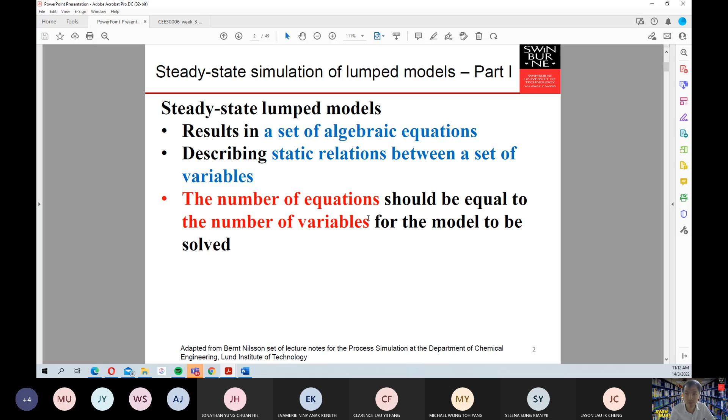So these are the two types of the lumped model that we have: the linear equation systems and the nonlinear equation systems. If you have linear equation systems like this, this can be represented in terms of a matrix, so that will be Ax equal to U, where A is a matrix, X is the matrix of X, normally a column vector, and U is also a column vector.

Okay, in some cases you may also have nonlinear equation systems, meaning it's not linear like this, so it cannot easily be described in terms of a matrix. Instead you have to maintain this form, where f(x) is equal to 0. We will start with the first type, the linear equation system, to solve.

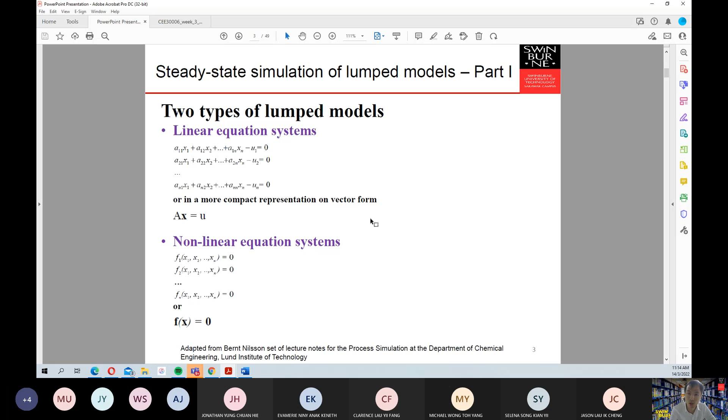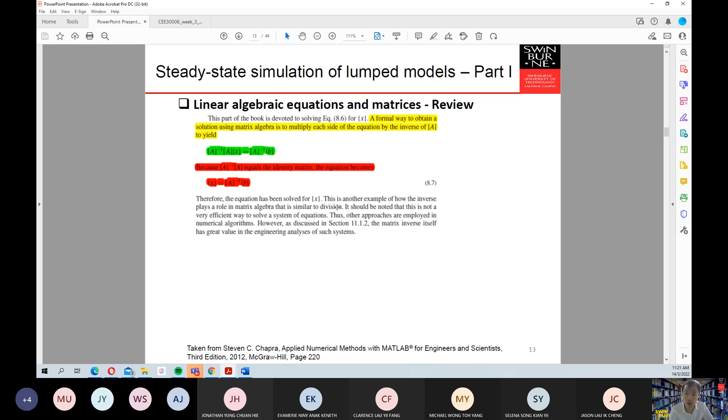Everybody knows this very well, and this is supposed to be easy in MATLAB. Now, we go a little bit into MATLAB. MATLAB is actually an abbreviation of matrix laboratory, because the way MATLAB works is it uses a lot of matrices, and if you can put your logic or computation operations in terms of matrices, that is what MATLAB is for. It's best if you use matrix operations, but it's not limited to matrices. It can also go beyond matrices.

The strength of MATLAB comes from its capability to do numeric computation, advanced graphics and visualization, and also a high-level programming language. MATLAB also has many integrated toolboxes that cover specific areas of engineering applications, such as process control, neural networks, optimization, signal processing, and symbolic mathematics.

Like I showed you in process control, your project one is based on MATLAB coding. That MATLAB code is used to simulate how a proportional integral controller is embedded into the temperature control of a continuous stirred tank reactor, where you have a mass balance, a component mass balance, an energy balance for your reactor, and also an energy balance for your jacket.

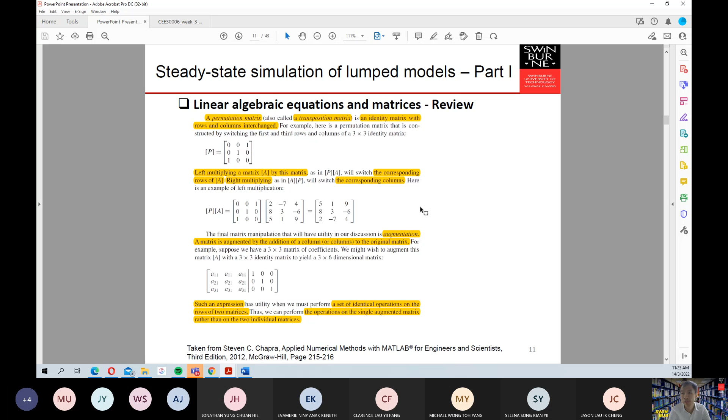You can also set up another 2 times 3 matrix. A 3 times 3 matrix cannot be multiplied by a 2 times 3 because the inner dimension does not match. 3 is not equal to 2. Then MATLAB will return error information in your command window. But if you multiply 2 times 3 by 3 times 3, then it will be possible, and you will have a 2 times 3 matrix.

You can also easily find in MATLAB the inverse of a particular matrix. If you multiply A with its inverse, then you will have an identity matrix. You can also make an identity matrix I equal eye(3), and you can make a permutation matrix and check. If you want to switch the rows, then you multiply P before A. Likewise, if you want to move the columns, you multiply A with P. This is how you make an augmented matrix.

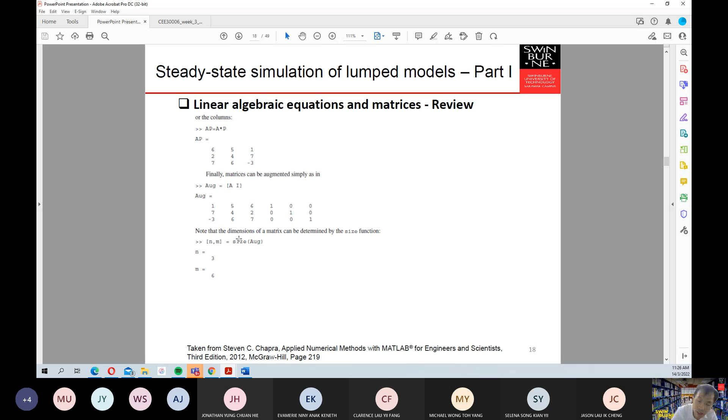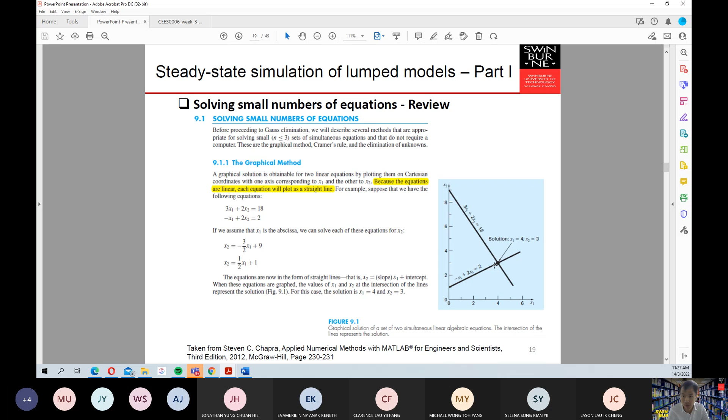In MATLAB, the command size gives you the number of rows and the number of columns. So if you have two equations, the easiest way to solve them is to plot these equations in the Cartesian coordinate, and plot the other equation as well. The point where the two lines intersect each other is where the solution is. So that's how it is.

And then this shows different cases where it's difficult to find a unique solution. For example, in A, because the lines are located at different locations, they don't touch each other, so you will have no solutions. In the second one you have infinite solutions because these two lines are basically the same. And in the other one the lines are almost intersecting at more than one point, so it's very difficult to detect visually.

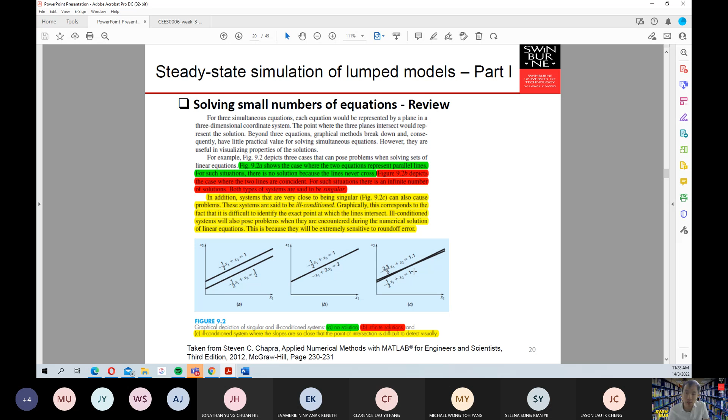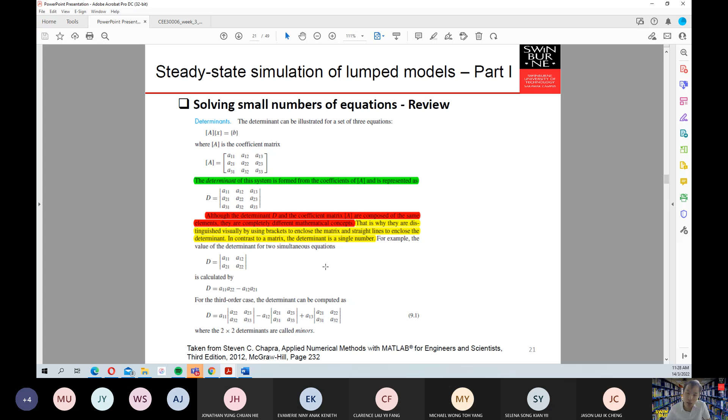So this one will give you a large error. This kind of system where you don't have a really specific solution is called an ill-conditioned system. So we can solve this set of three equations using something called determinants. The determinants show you how they are being solved.

However, the best way to solve a matrix is through Gauss elimination. In Gauss elimination we use forward elimination followed by back substitution. So this is how it works. Imagine you have n equations. What we're going to do is try to make all these equations into this kind of matrix, where all the components below the diagonal elements become 0, so that we know the value of the last x.

Once the last x is known, we can back substitute into these equations to get the next component, x2. Once we know x3 and x2, we can back substitute into the first equation to find the value of x1. So everything will be working like this.

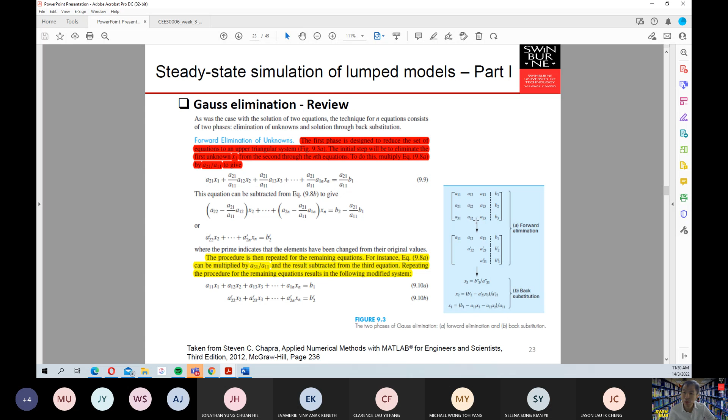What you need to do is multiply by a21 divided by a11 in order to get the same value as a21 here. Then you subtract these equations from this one. Once you do that, you will get this. Then you do the same thing with the third one, until you get this.

I will not go into the details here, but I think you will be able to understand the logic easily if you read it in detail. So we have two main steps: the first one is the forward elimination of unknowns, and the next one is the back substitution.

So these are the examples. Okay, I think you can go and check my recorded video to see how I do that. I recorded it in previous years, and I think I have uploaded it into Canvas, so you can replay it to see how the Gauss elimination is done.

So you have these three equations here. The first thing you need to do is eliminate this component here and this component here, so you will get this. Then afterward, using this one, you eliminate these terms here, so you have the matrix where the components lower than the diagonal are 0. Then you will be able to find your x3. Your x3 will be equal to a certain value. You back substitute here and back substitute here to get the x1.

The thing that is very important here is to resubstitute your x1, x2, and x3 as a check to make sure that you recover these equations from the beginning. It's always very important for an engineer to cross-check to make sure they get the same values that are defined in the beginning.

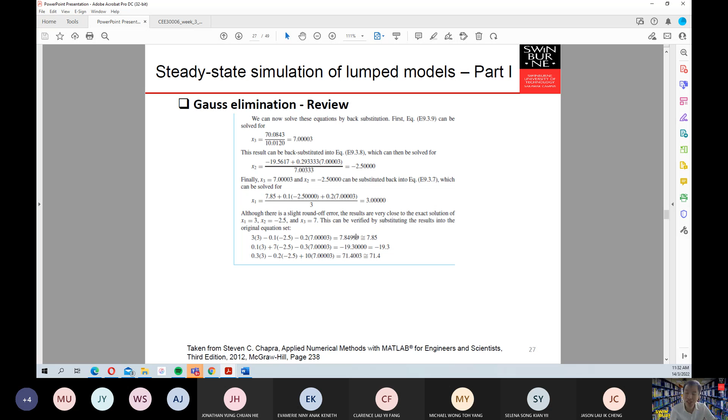Everybody is still with me? Or because it's almost lunchtime, you feel a bit sleepy like me, ready? So now we have... okay, yeah, good. You can go a little bit away from your table, Jason. It's okay. I just get my tea a little bit here, and that's allowable.

So we have gone through the discussion in lecture 2 of the 6-plate absorption column, right? We developed that in the previous lecture notes. So now here we would like to solve the model. Remember, the first one comes from the component mole balance. The second one here comes from your thermodynamics, and then we take the simplest assumptions.

If I were there, I would be happy to share my tea bag with you, Clarence, but unfortunately I'm not a fan of coffee, so I don't have a coffee bag.

If we have this thermodynamics here, it is the simplest thing that we can do to picture it.

Well, I don't have Mamak easily outside my house because I don't really go into the office today. Okay.

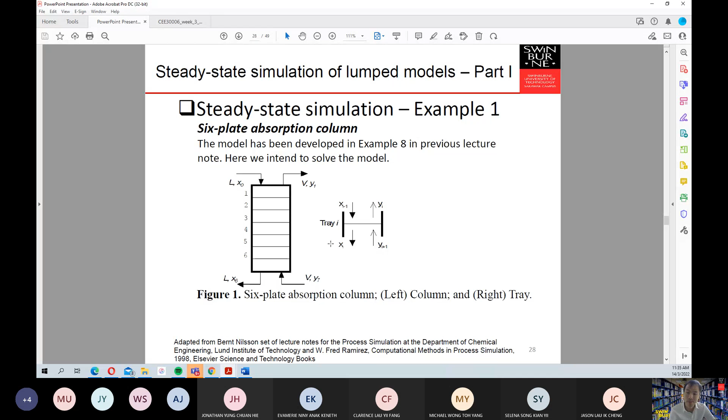Now this has been clearly written here. This is the mole fraction in the starting liquid, and the mole fraction in the starting vapor. We can add another simplifying assumption such that b equals 0. That gives us these things here, which can be written in matrix form like this. So guys, this is very important: you need to visualize that this component here is actually the same as these things here.

Okay, because the way that the matrix is working for the first row in here is that minus (L plus VA) multiplied by x1 plus VA multiplied by x2 is equal to minus L x0, to get this one. On the second row is L multiplied by x1 minus (L plus VA) multiplied by x2 plus VA multiplied by x3 is equal to 0 in here.

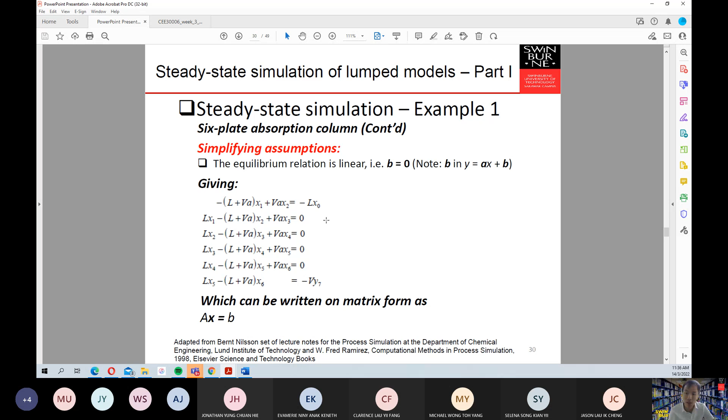Okay, so this has the same form as this form in here, and this is the so-called banded matrix. So this one is similar to your tridiagonal matrix basically. Okay guys, everybody gets it up to this point? Okay. So what you need to do is easy. You can either multiply the inverse of A by B, or you can just use left division operations to get the value of your X.

Okay. So how do we solve these things? So the first example is we need to set up a typical set of parameters. We put in an A value of 0.72. This one is coming from the thermodynamics. It has to be physically relevant. Your V has this value in here, 66.7 kmol per minute. Your L is 40.8 kmol per minute.

We want to solve for the two cases. For x0, imagine that you are putting in pure water, and the mole fraction of the component that you want to scrub is 0.2, the other one is 0.3. So these are the solutions for each. For x1 you will get 0.0614 and this is 0.2547. If you put in 0.3, then obviously your x1 will be larger than the respective one in here.

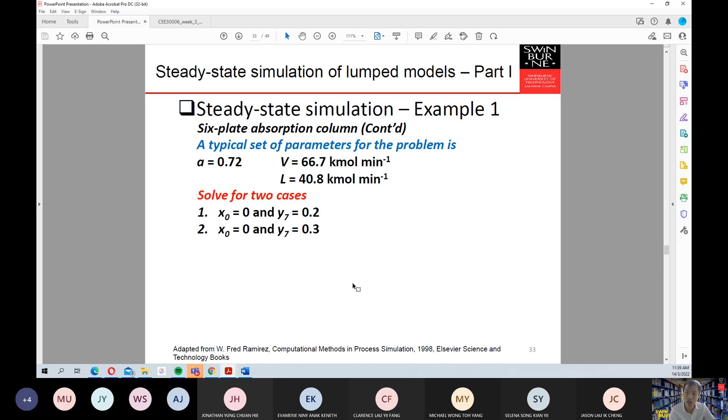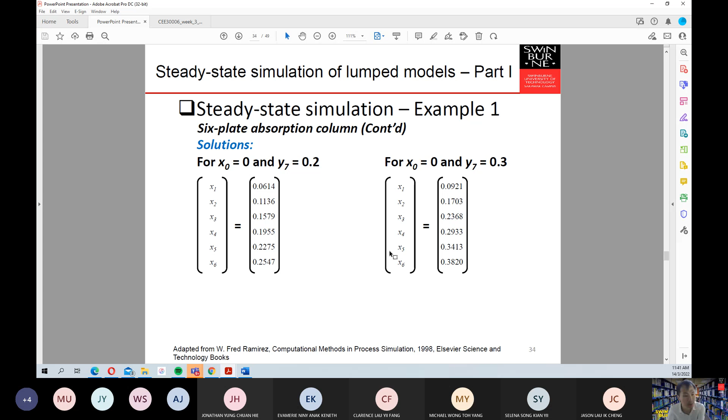Then you can use either matrix inversion, or Gaussian elimination or the left division to solve that thing. Then these will be the solutions that you get, which are supposed to be the same as the solutions in here. Guys, up to this point, I hope you understand. So this is if you just want to use it the easy way.

That's just 10 lines of code. I want to run the MATLAB coding in here, but I'm not too sure whether we already have access to that or not. Probably not. So if you have MATLAB on your computer, then you can try these things and see how to use them.

Okay, start using MATLAB. I'll try to see first whether I can use this or not. If I cannot use it, then I will not be able to demonstrate to you. But I have contacted Usha to check whether we have these things already or not, because I tried to use my Swinburne one, and it was also not working last time. But you can always install the crack version, or you can go into the Open Computer Lab that has MATLAB.

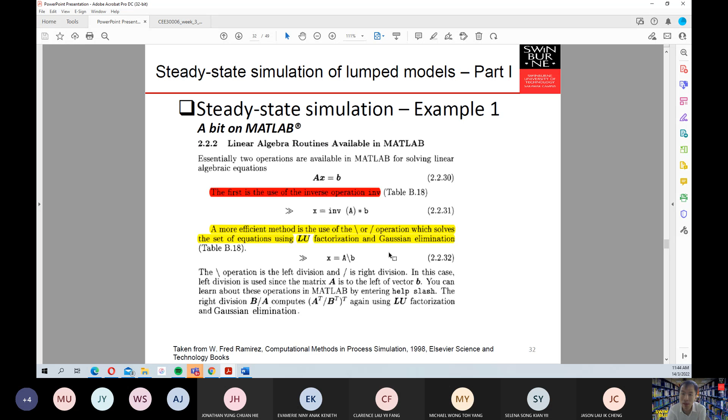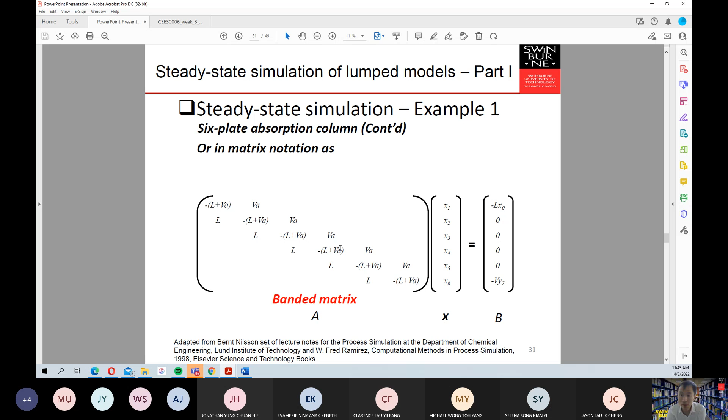So we can simply create this matrix easily using this particular instruction. And then we can easily create this U here. This is your column vector here, right? This column vector is what is being created. Then you do left division.

How do we know that this gives you the same result? Because the result given is the same here. If you compare it with the previous one, the result is the same, except that we are dealing with much shorter coding. So coding is a skill that you can master, not easily, I would say, but you can master it after you keep on trying and exploring and learning.

Okay, the same thing. What you need to do with the 0.3 is just change the value of y7 here, and you should end up with the same solutions as these solutions here that you get from the 0.38 to 0. So far, before I go into the next example, which is a bit more comprehensive, I would say, does anybody have any questions?

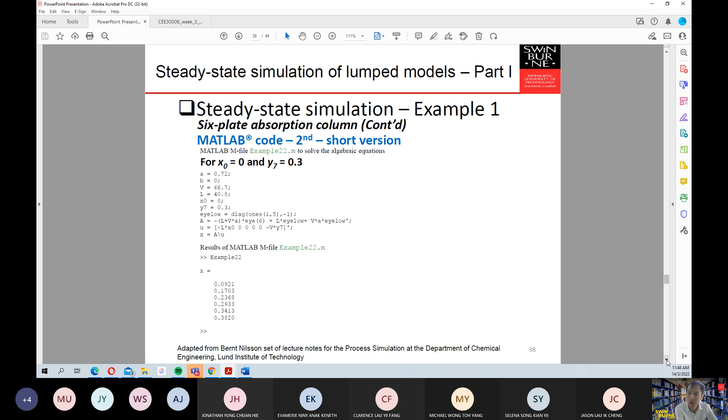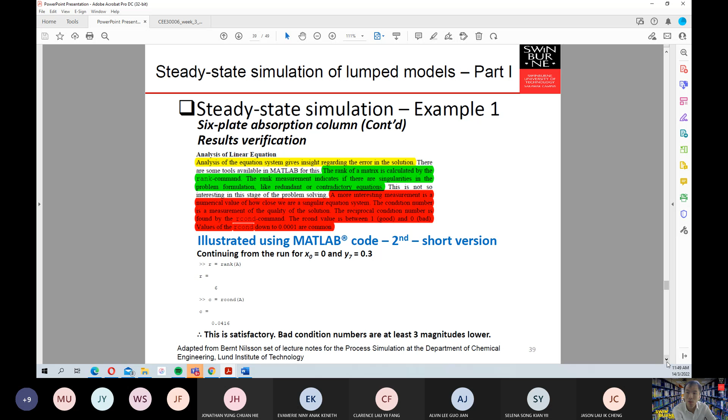Okay, so is everything clear up to this point? Then in particular situations, if you are wondering whether your system may provide singularities, or how good your system solution is, what you can do is check using the rcond command. You can do that using rank and rcond. Generally, the rcond value that is much farther from 0 is better. So if you put in the matrix A here, you will get that the rcond is 0.0416, which is quite good for your problem statement.

Okay, now who is taking process mass transfer already this semester? Anybody take process mass transfer already, or will that be next semester? Has anybody gotten mass transfer a little bit or not? No? Alvin, you did mass transfer already, right? Clarence, not yet. How about Yusi? Yusi, not yet. Jonathan, you did it with me, right? Last semester already, Jonathan with me.

Unfortunately, process modeling and control, process modeling and optimization covers so many models as well, and I cannot just keep my coverage to heat transfer only or momentum transport, because you guys need to know much more than that in order to understand what process modeling is about. So I have to introduce some concepts even before you learn about process mass transfer. Yep, supposed to be Clarence, I think. That sounds about right, I think.

But we will go a little bit into the McCabe-Thiele method here. McCabe-Thiele method basically shows you how to calculate the number of stages needed to achieve a particular separation for a binary distillation column that is ideal. McCabe here comes from the name Warren McCabe, an author of the textbook in unit operations. Thiele also comes from a famous chemical engineer. If you go into mass transfer later on, you will know there is a ratio between reaction and diffusion, and you come up with a dimensionless number called the Thiele modulus. Both of these guys actually got their education in America. I think Thiele is educated in MIT, if I'm not wrong. Both of them are heavily involved with research in chemical engineering, and I think both of them have a PhD in chemical engineering.

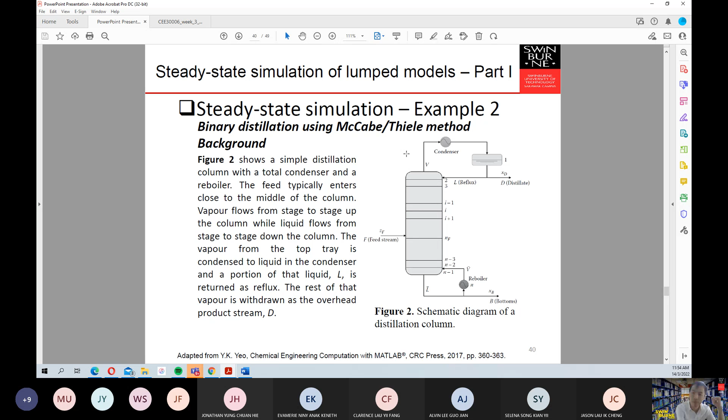So in the end you will have 2 components here, the distillate and the bottom components. A chemical engineer will split this distillation column into 2 different balances, like the same case with the absorption column: one is a mass balance, the other is thermodynamics. That's how a chemical engineer designs this kind of unit operation. In terms of absorption, you have thermodynamics and you couple it with the mass balance. So for this particular problem, we are splitting this distillation column into 2 major portions: the top components here, and the bottom column here.

The section we split at the top here is called the rectifying section of the distillation column. The reflux ratio here is defined as R equals L divided by D, because this represents how much you put back into your column relative to the amount you take out of the column.

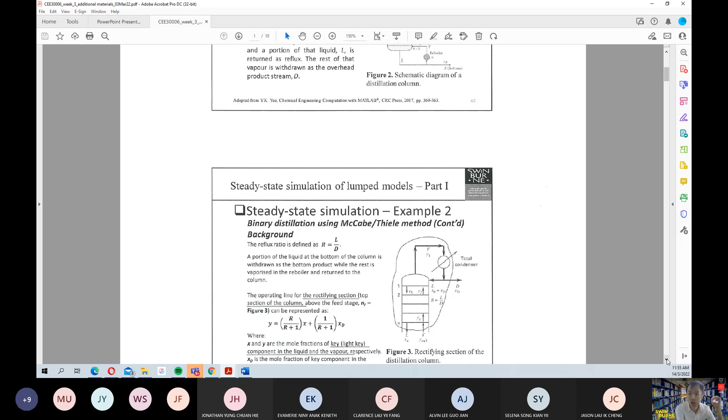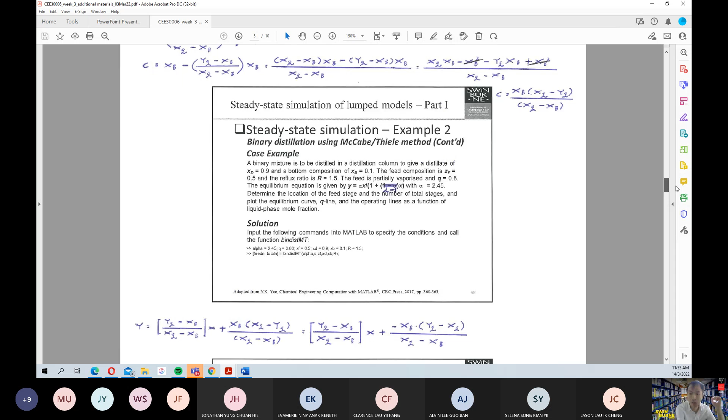The operating line for the rectifying section can be represented by these equations. If you want to express this in terms of the reflux ratio with x and xD, you might ask how I derived these. So you go back into the additional materials. I won't go into the details here, but in one of my recording videos, I showed the details, including all the equations needed to understand how we derive these and how the MATLAB code works.

This goes back into the lecture notes that I took from somebody else. This is the so-called McCabe-Thiele graphical method. You'll get this in more detail in your process mass transfer course, but you already get it in much more detail from now on, because this is part of your process modeling anyway.

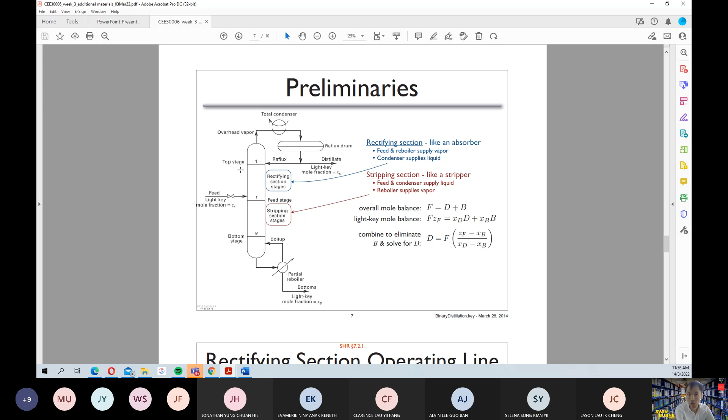So to figure out how you're going to do that, this is the mass balance on the whole column. If you want to make this boundary fit with the distillate and the bottom, this is what you need to do.

If you want to make the balance on the rectifying section, this is the additional material showing how to do it. You make the mass balance over these boundaries, consisting of the overall mass balance and the light key mole balance. Then you use this, do a little mathematical manipulation, and you get these equations here.

Okay everybody, I hope you are clear with me up to this point. Everything has been given to you, but you need to figure out the details by yourself. So these are the rectifying column equations.

Then we can go into the stripping section of the column, where you have the reboiler. If you make the same mass balance as before, what you essentially get is the operating line expressed in terms of the boilup ratio. The boilup ratio is the same concept as the reflux ratio, in that it represents the ratio between what is put back into the column and what is taken out of the column.

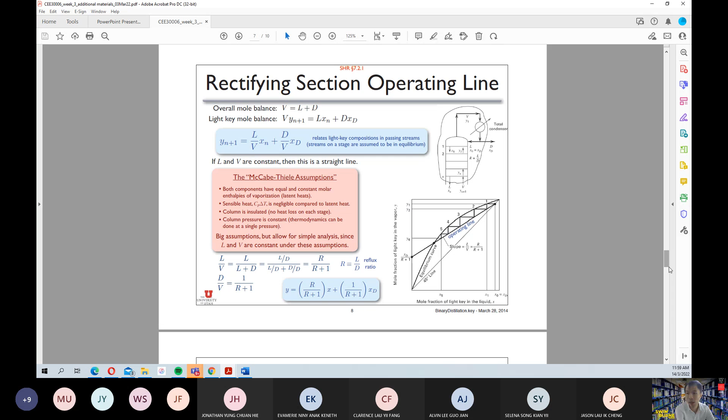So how about the stripping section? It's the same approach. Now, this is a mistake that I found and need to correct, and you guys need to check everything. That's why after the lecture, it's very important to always check everything to make sure it's correct.

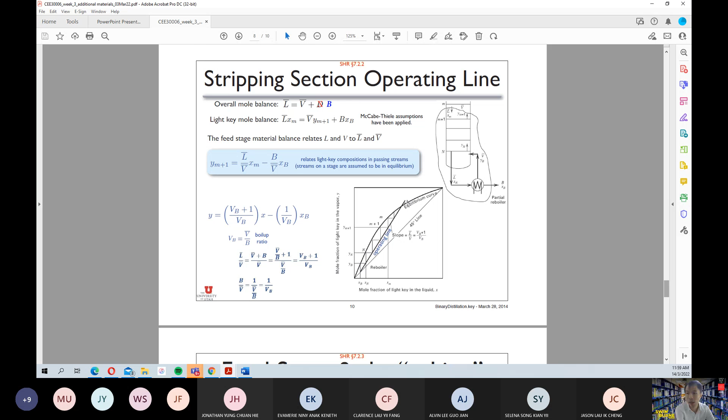If you do these things correctly, you will get this result, and this gives you the operating line here.

So you will have a set of relationships depending on your feed condition. If it is a subcooled liquid, it will go down. If it is a saturated liquid, it will go down as well. If it is partially vaporized, the vapor fraction will go up and the liquid will go down. If it is a saturated vapor, it will go up. If it is a superheated vapor, it will go up. That will affect the slope in here.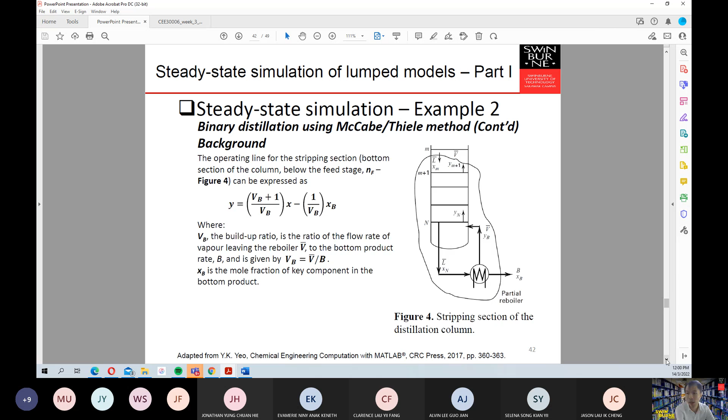So if I go back again to my original slides, after you figure out the stripping section, you will be able to go and basically check these conditions in here.

This is basically characterized by the parameter Q. Q is the ratio of the increase in molar reflux rate across the feed stage to the molar feed rate.

So this is basically expressing what will happen as you go from the bottom to the top, from the stripping section to the rectifying section.

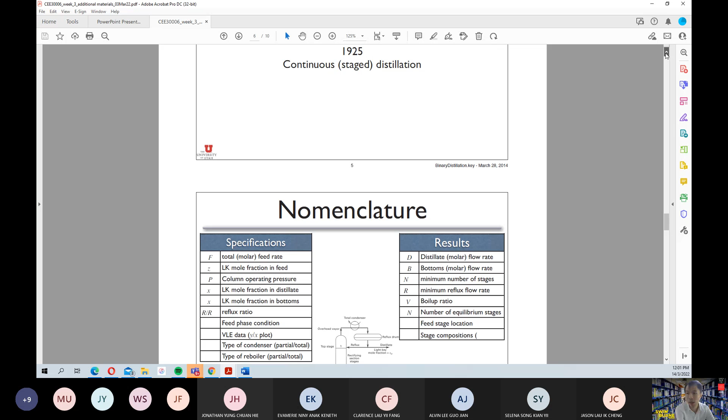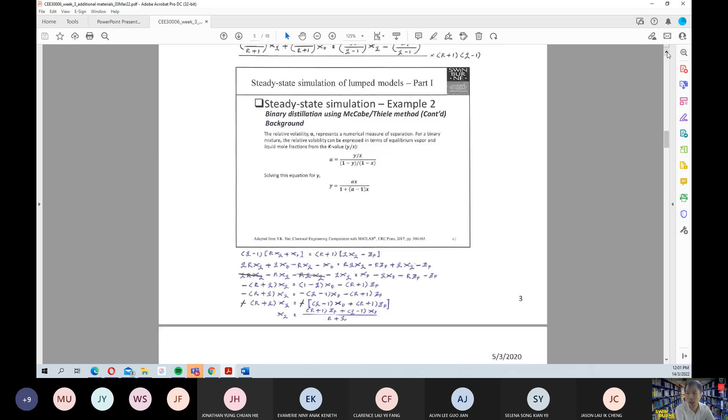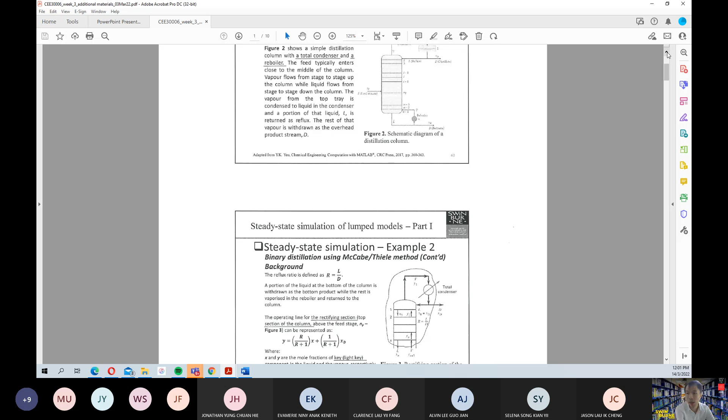Okay, and this is also where you can derive the Q-line equation. All of this has been given already in my additional materials. You guys want to go back into my derivation for those interested to find how to do these things, and I'm happy to explain if you are willing to go into the details of this equation. I have tried to cover how I derive these things, and I have uploaded this into my Canvas. So you need to understand how to cross-check, review these things, and see how you get these equations. I have gone into detail to make sure everything is understandable.

So we have these things from the rectifying operating line and the Q-line equation, and we have this equation. Then you can rewrite the stripping operating line in terms of these things as well, and you can also solve for y in terms of the relative volatility and the value of x as well.

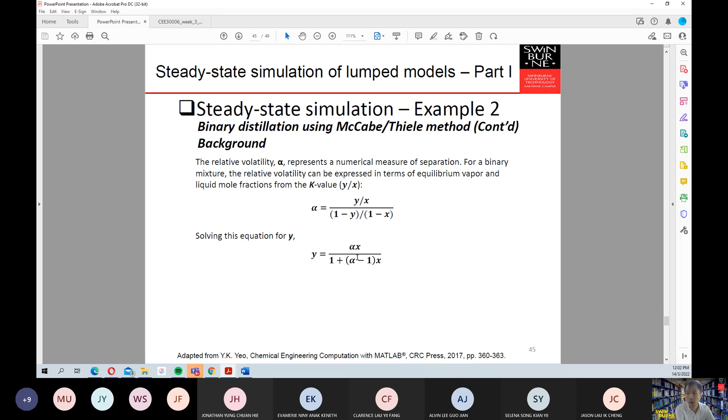This example is based on an ideal situation. This line gives you y from 0, 0.1 up to 1, so this vector consists of 0, 0.1, 0.2, 0.3, 0.4, 0.5, and so on until 1. Then this y equals this y, and then you calculate this x using these particular equations in here. As I wrote, how you get your x comes from these equations.

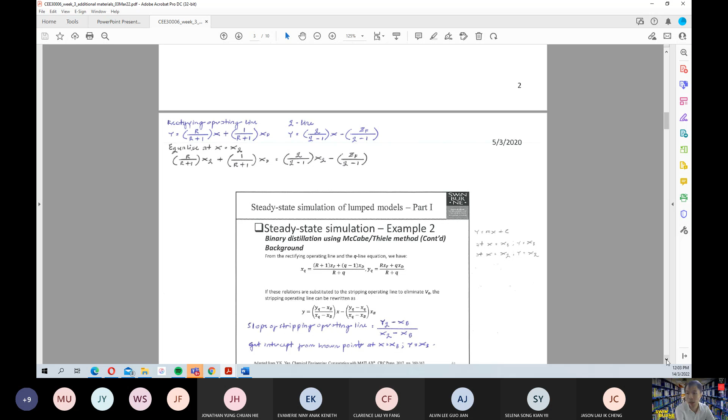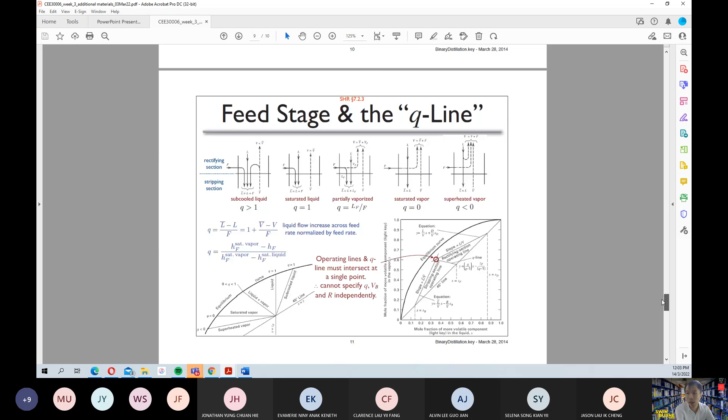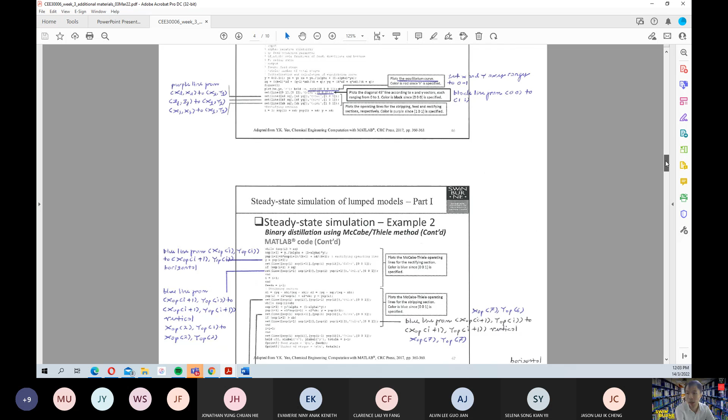Okay, I think I should put it somewhere in here. You just need to cross-check which part I put in here. I go quite detailed, I think, if I'm not wrong. I just made additional notes on the important things, because this lecture notes from the University of Utah is already very good, so I don't need to add too much. But the important things, I give in this particular slide. Just cross-check whether everything I made is correct. If there are any mistakes, let me know and we can correct it together.